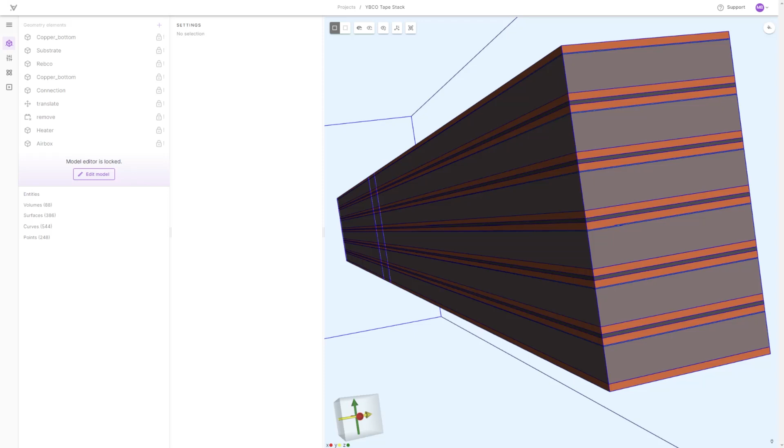So in this video I'll only show you the modifications made in order to couple that circuit, and I'll also show you how to create an extruded mesh with the GUI. But I won't show you all the setup processes that I already did for just the stack simulation, so you can have a look at the other video that was already uploaded to the YouTube channel to get into the stack itself. This video is focusing on the circuit coupling.

So first I'm going to create a new project. I call it stack circuit coupling. And I'm going to build the stack geometry here, so the same as in the other video. Okay, so that's the geometry. We have the airbox, we have the stack in the middle, and we have a middle volume to keep track of the quench initiated there.

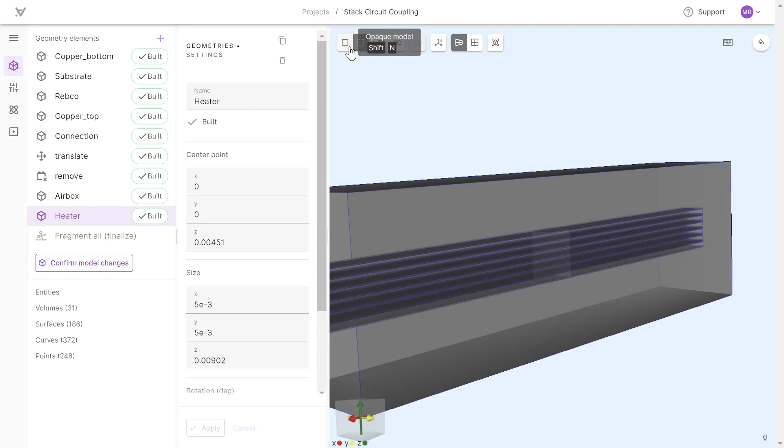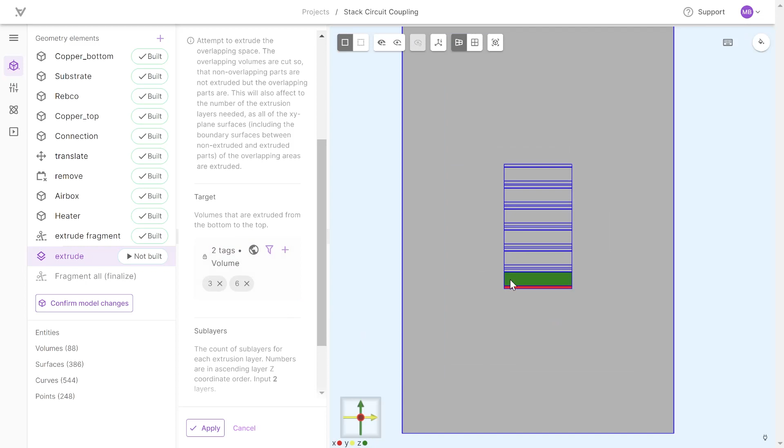And now I'll show you how to construct this extruded mesh. So we go to extrude, build all the previous elements, select the extrude mode such that we can also capture the airbox around, and then select all the layers that we want to have the extruded mesh in. So basically I could select all volumes and then deselect the airbox.

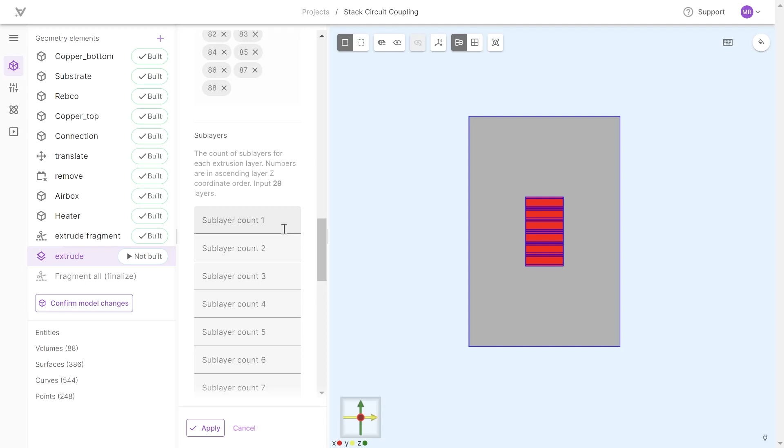And now it says I have 29 sublayers. It's because I'll have 29 layers in that direction, and I have to give the number of extrusion layers that I want to have per sublayer. So how many mesh layers I want to have. So it's going to be 6 for the copper. We start from the smallest Z coordinate and then in ascending order. So we're going to start here and then go up.

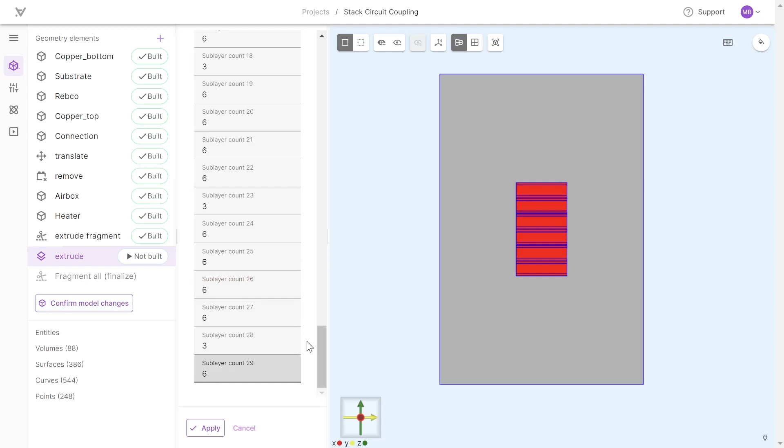So 6 for the copper, 6 for the substrate, 3 for the Rebco layer, and then 6 for copper and 6 for the connection. And then we'll start over again with the same. Well, and I end up with 1 Rebco layer and then the copper layer, so everything makes sense. I apply that and extrude it. Alright, so you can see it's extruded in that direction, such that we have this layered mesh in the end.

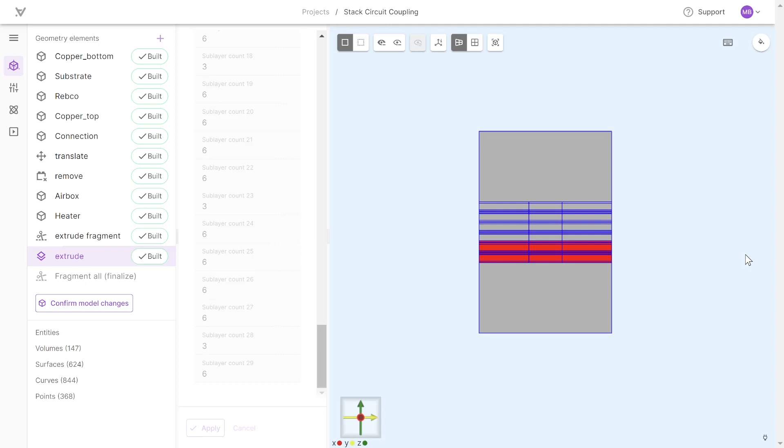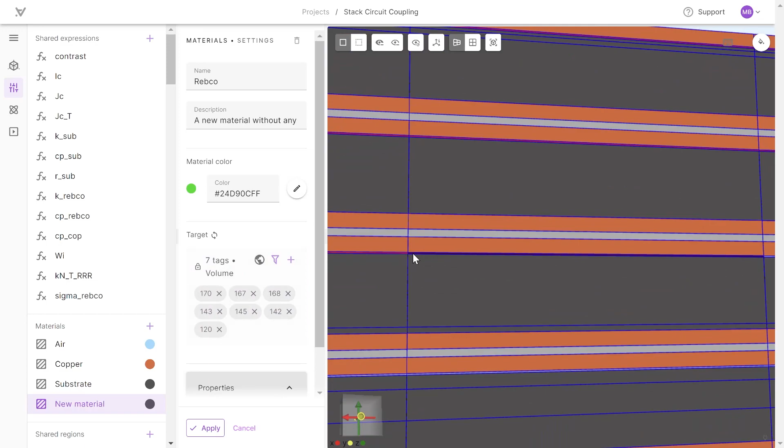We confirm the model changes and we go on to the material and the shared expression definition. That is mostly the same as in the stack video, so I'm just gonna do it and then later show you what is different. Okay, so now we have all the material definition, we have assigned the volumes to them, and have the two shared regions, conductor and fixed temperature, as same as in the other video.

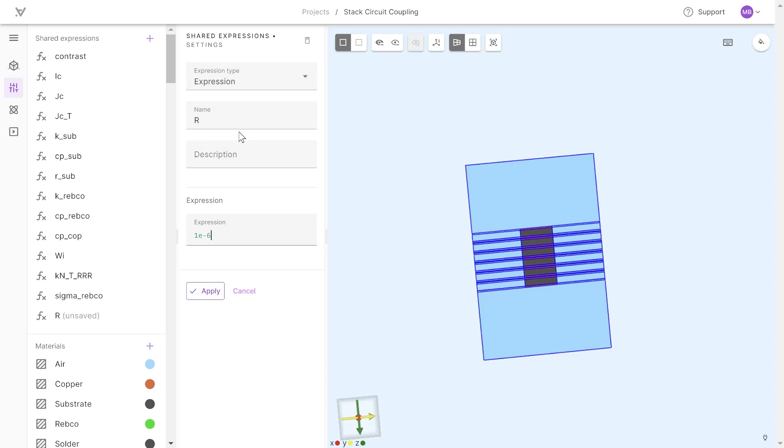And now I'm going to add 2 expressions. One is the value of my resistor that I'll couple, so it's 1e-6, and the second one is the operating current, which is a ramp within 3 seconds up to 1.5 times the Ic of the stack.

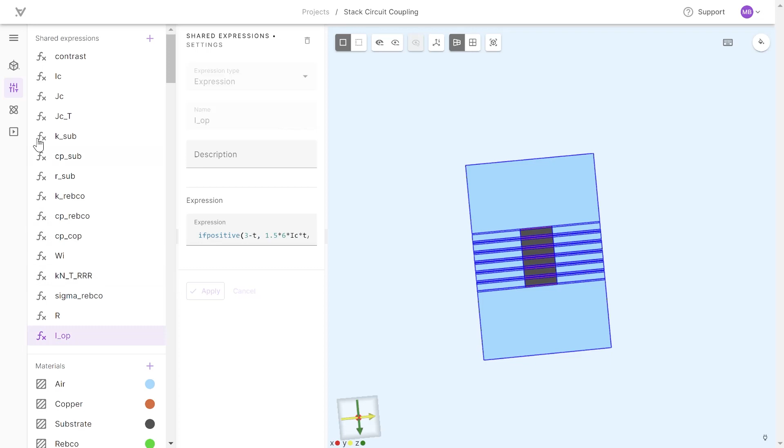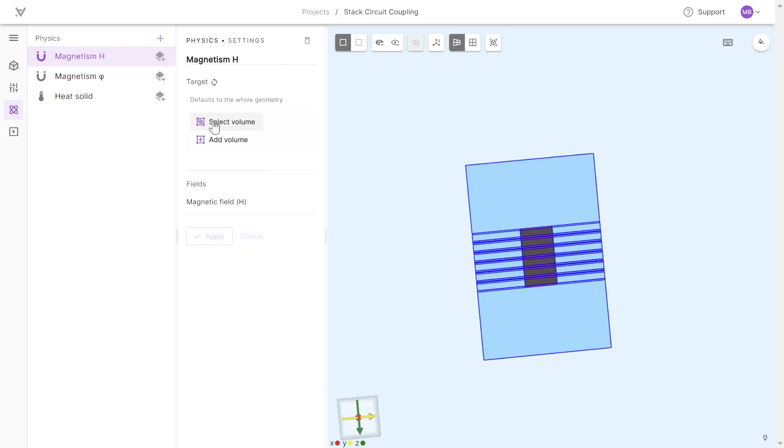Okay, now we can continue to the physics section. And here we're going to define our H-phi physics as usual, and then the thermal coupling as well. So the thermal one will be in the conductor, phi will be in the air region. Okay, so that's the conducting region, H, and for phi I still need to make the air region visible. So yes, now it should be visible. So I can select the air region now.

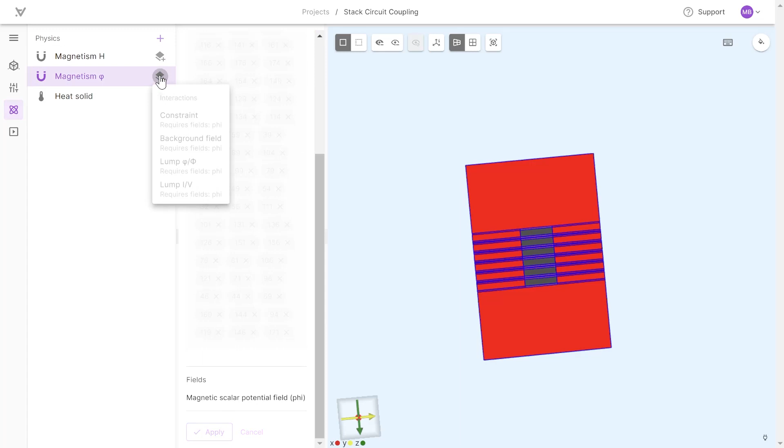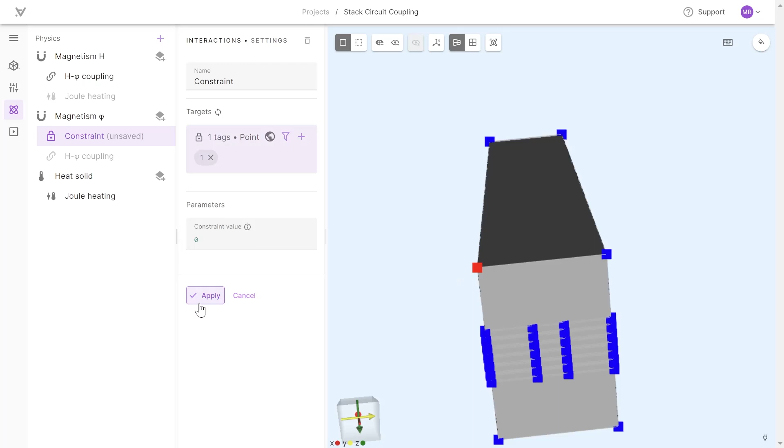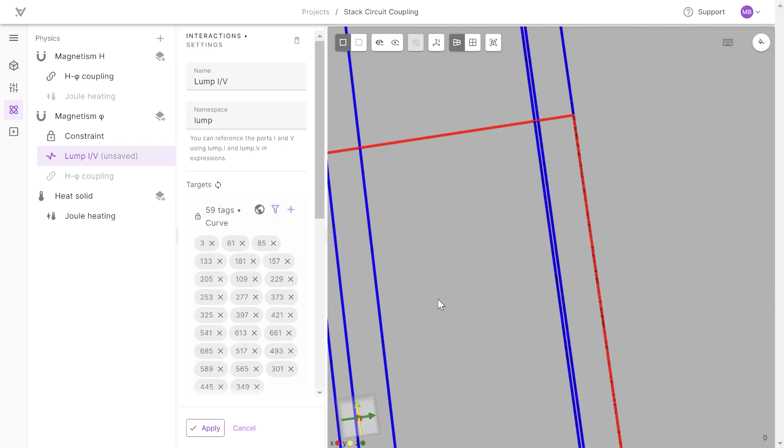Then I'm gonna choose H-phi coupling. I'm gonna choose Joule heating in the conducting region to couple it to the magnetic simulation. I set a gauge at 1 point, gauge it to 0, and now I'm gonna supply that current or the circuit coupling. So my port is gonna be that entrance circulation loop around the stack. I'm gonna select it. Okay, that's the circulation loop.

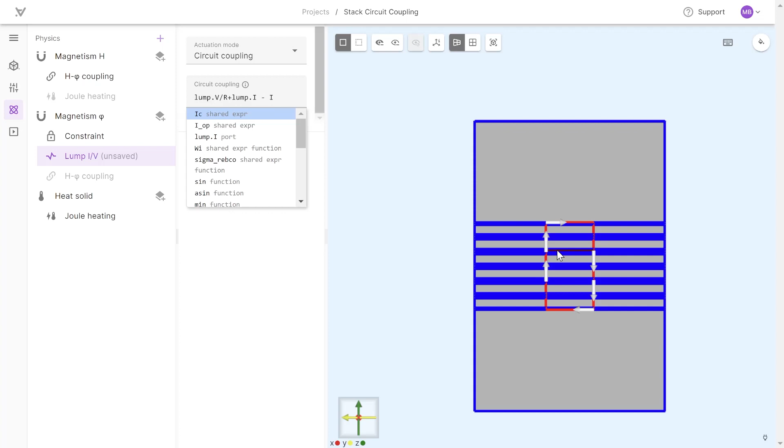Now we have to select: either we could just set our current as in the previous video, or now we're gonna put the circuit coupling here. So for this I can take lump V over R, which is the current flowing to my resistor, plus the current flowing through my stack, which is lump I. So that's the I flowing through that region that is enclosed by the circulation loop, and they should add up to the operational current. That's my circuit coupling equation that has to be fulfilled.

Okay, so that's everything for the physics, and now we can define our simulation. So I'm gonna choose transient type with implicit Euler, 0 to 5 seconds with a time step of 50 milliseconds. Gonna run it on one node, and it's gonna take a bit longer than 3 hours, so let's say 200 minutes as timeout. Then we can create the mesh.

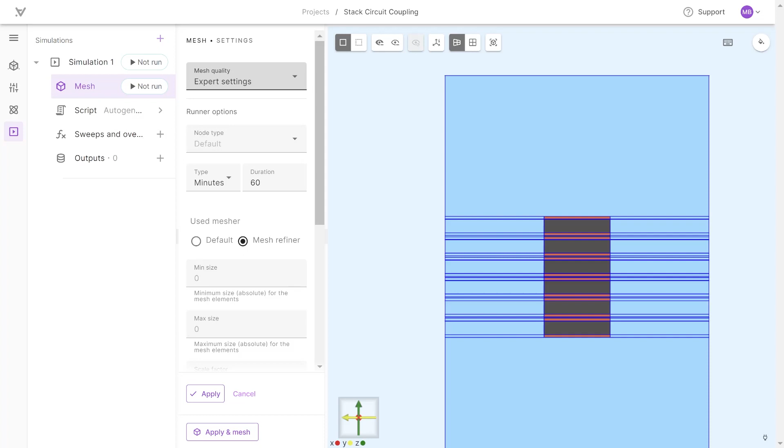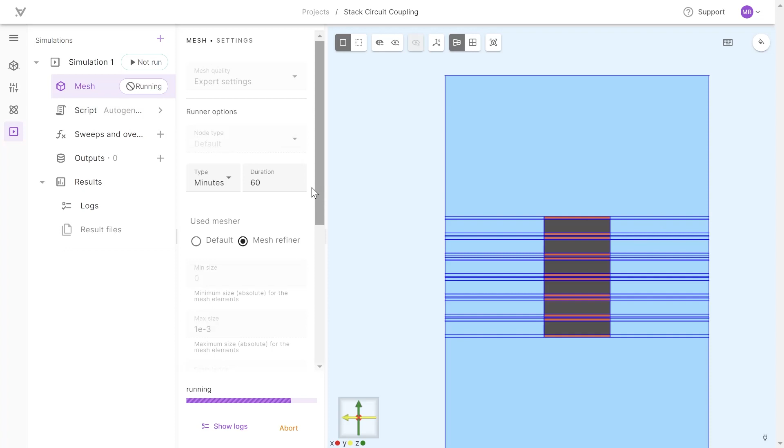With the max size 1e-3, and let's see where we end up with. And then as outputs we can, for example, take some discrete outputs. So one is the current flowing through the stack, which is lump I. And then as a second discrete output I can put the current through the resistor, which is lump V over R. Alright.

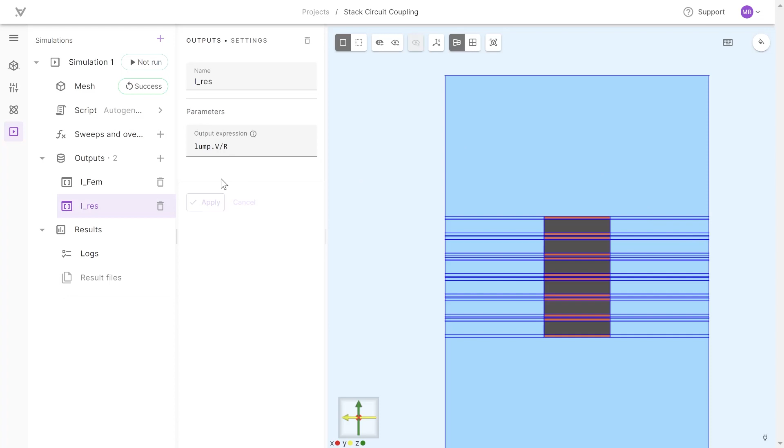Then I can make a few changes in the script. So first I need to scale my mesh in Z direction, because again I just built it 10 times bigger as it is to make it easier to select the volumes. Then I can reduce the order of phi and the order of T. Set an initial temperature value everywhere to 77 Kelvin.

I also forgot to set the constraint for the heat solid. So I can do that also in the scripting interface and just add it here, and constrain the defined temperature fixed regions to 77 Kelvin.

Exactly. So what else? You can see now there's this lump interaction, and you can see that to our formulation we added this circuit coupling formula. And what we can do now, as we also did in the other video but adapted for this new circuit coupling formulation, we can linearize our formulation for the Newton iterations.

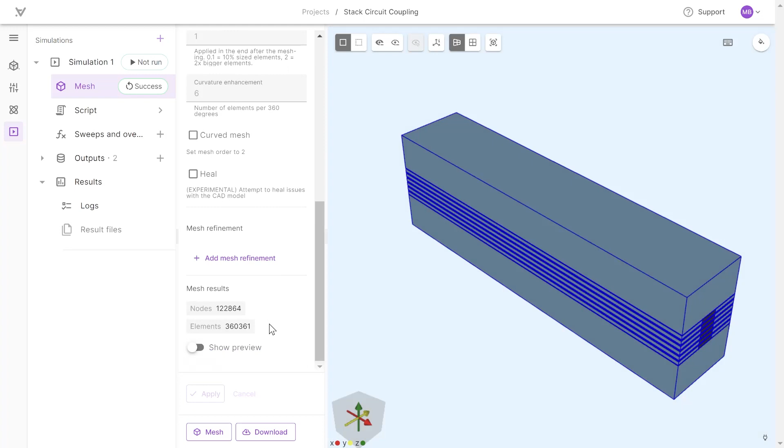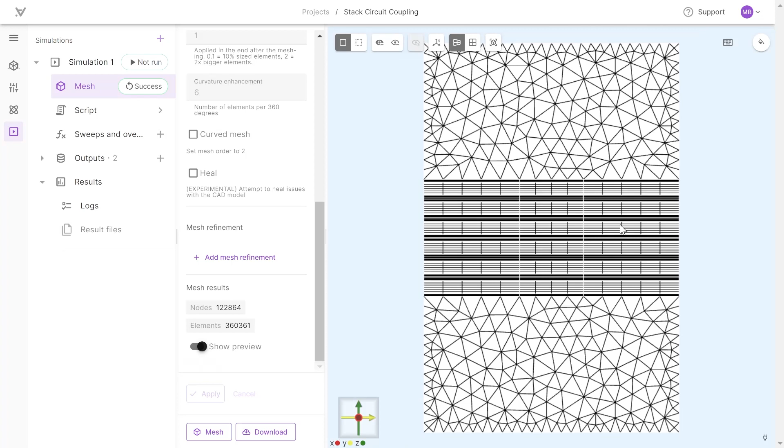And let's have a look at our mesh now. Okay, so we can see that we have a tetrahedral unstructured mesh here, and that here we have the layers inside the REBCO, inside the whole stack, all layers of the stack, and it extrudes towards the outside of the airbox. Okay, so now we can start running the simulation.

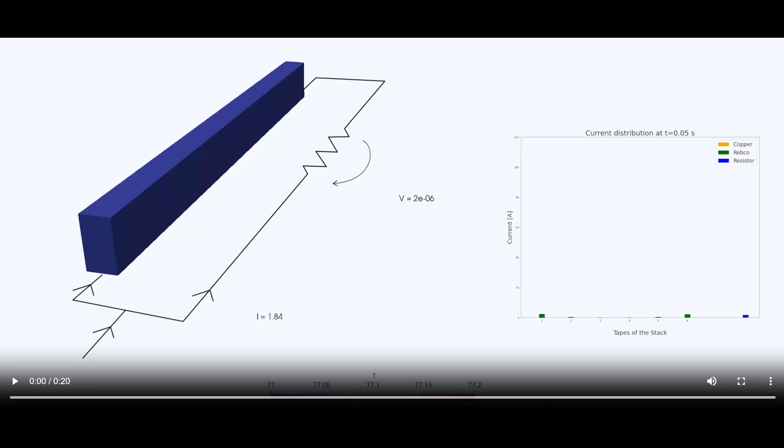Okay, we can take a look at the results now. So on the left hand side you can see our stack, and it shows the temperature, and it's gonna be as before, rising from the middle towards the outside, but you can already see from the scale that it's not heating up as hot as it was without the coupled quench protection resistor, which is a good sign because that's actually what the resistor should do. When the current exceeds the critical current in the stack, it should take over some current and therefore prevent the quench or prevent the temperature rise to be too sudden and too high.

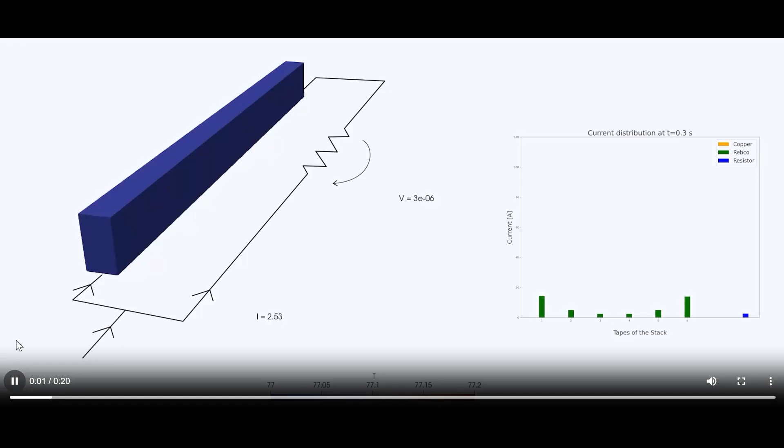And on the right hand side you can see the current distribution over the stacks, and then also the resistor in blue at the right hand side. So in the beginning we have very low voltage, we have a very low current running through the resistor in comparison to the currents running in the tapes of the stack. We can see that we have higher currents on the outer REBCO layers in the stack, and then it redistributes towards the middle.

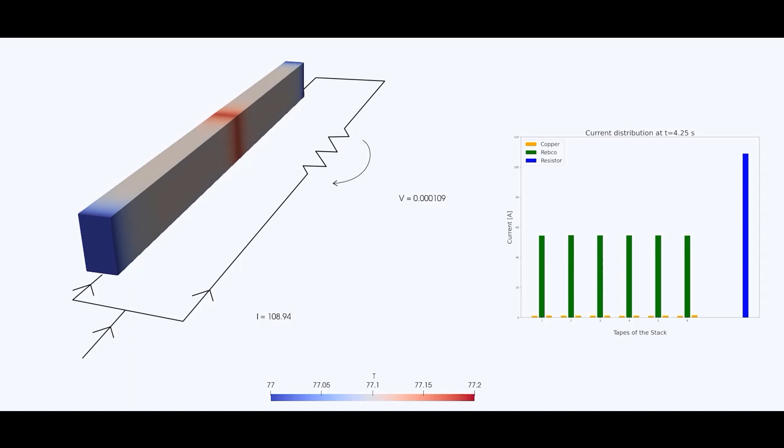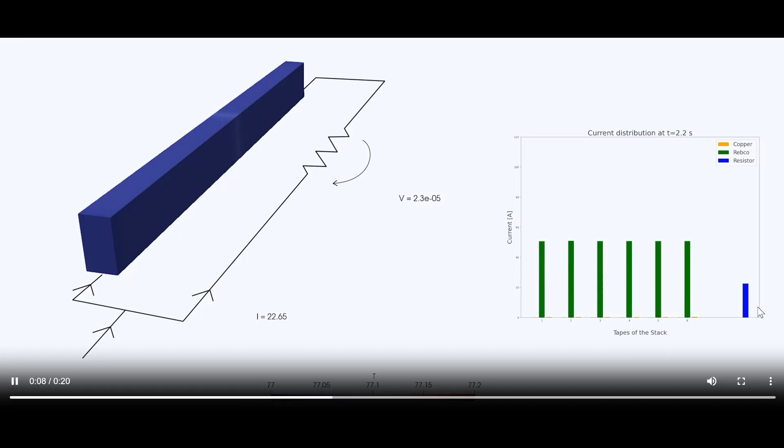So I can play now this video, and you can see that the outer layers are rising and then it distributes towards the middle, and then we can see a sudden rise in the voltage and also a sudden rise in the current flowing through the resistor, and we can see a heating up starting from the middle towards the outside of the tape. So I can run it again. So now it reaches the critical current and we have a sudden rise in the current of the resistor and also in the voltage.

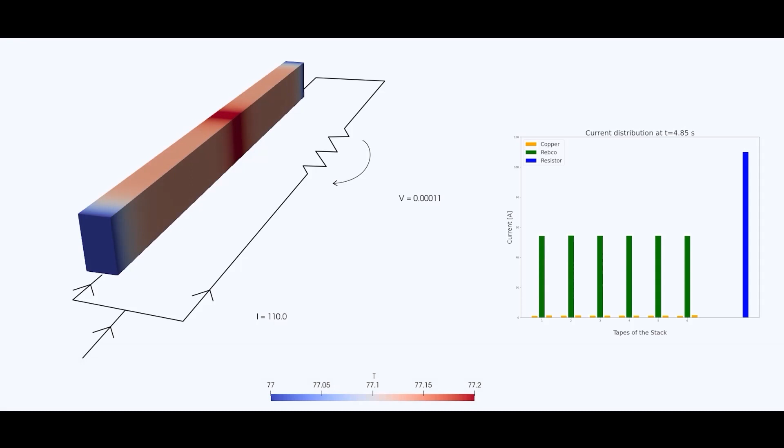So that's the expected result, and the simulation shows that this holds, and we can couple whatever lumped circuits that we want to our finite element simulation of the stack.